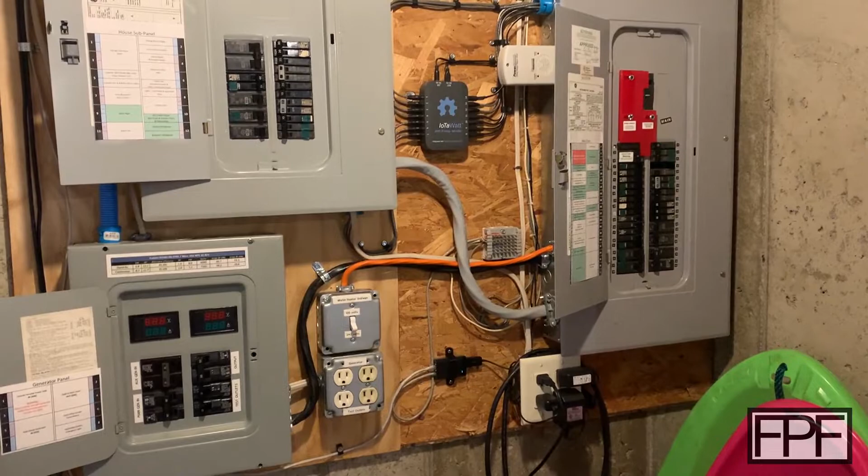I live out in the country and the power is not super reliable out here, so I have a backup generator. And this is my main panel here.

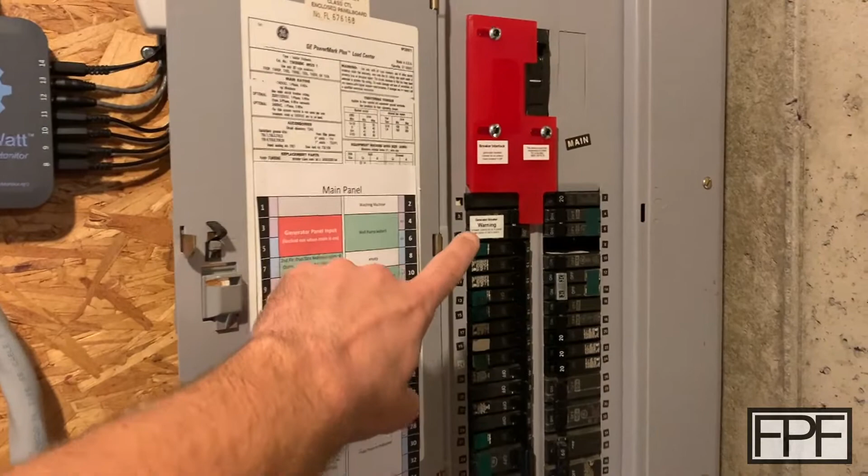Years ago when I put the backup generator in, it essentially backfeeds a breaker here. And what makes this setup safe is I purchased a physical interlock that makes it so this breaker must be turned off to be able to turn the main breaker on.

If we have a power failure, I can turn the main breaker off, slide this over, and then it allows me to turn the breaker that backfeeds this panel from the generator on.

Now this doesn't actually run right to the generator, that runs over to this panel here. This is the panel for the generator. It's just another electrical panel that I reused.

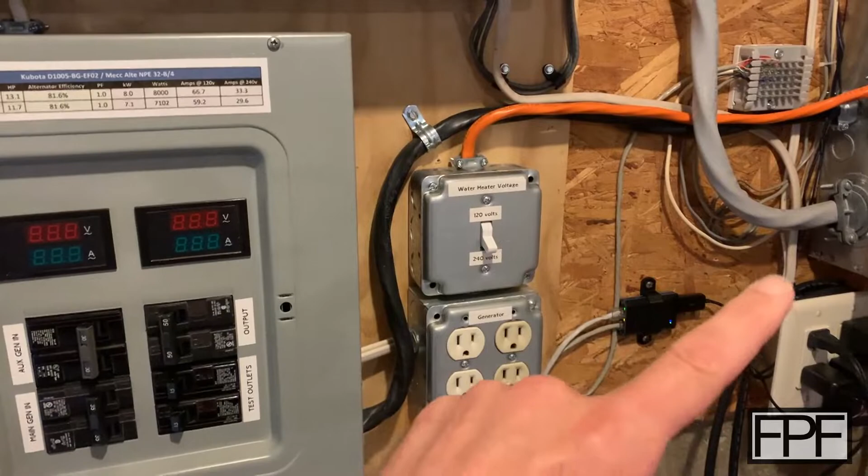I did this for a couple of reasons. I wanted to have these meters in here to see what the load was. Also have the ability to feed some test outlets even if the output to the main panel was not on, but also to support a second input for another generator.

And I am using that now. So this is the input for my main generator. That is a pretty decent sized diesel generator in an outbuilding.

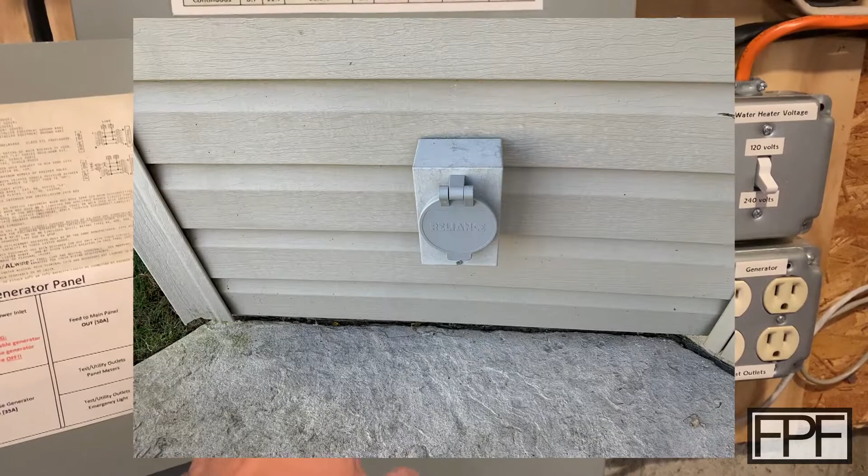But I also have this aux gen input that goes to just a power inlet on the outside of my house that I can connect a portable generator to.

In fact, I've got one of those little Honda inverter generators, so that if for some reason I have a problem with the main diesel generator, or I just need to stop that and service it, like change the oil or fuel filter in an extended outage, I can switch over to that power inlet and use a smaller generator to power just essential circuits.

The problem here is I have no interlock, so you can imagine a scenario here. There's no power to this panel right now, but if I flip this on, now I've connected electrically my main diesel generator into this panel, no problem.

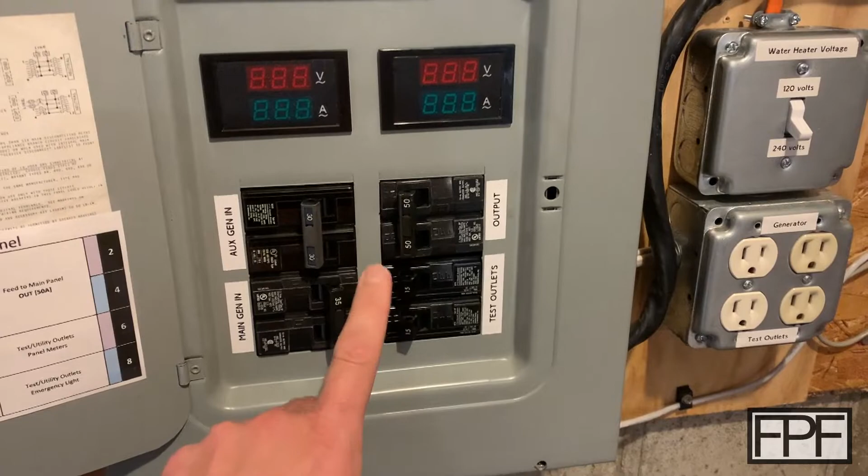But if I turn this on as well, okay, well now I've also electrically connected the generator inlet on the outside of my house. Well, there's nothing plugged into it, that's just fine, no problem.

But if I had both of these on at the same time with either one of these generators running, it's going to try and energize the alternator on the other generator and cause some pretty significant problems, both from a physical and electrical perspective. I mean, there might be some protection on the input of at least the smaller generator, I'm not sure.

But it's going to try and turn the stator on the other generator, and if they're both running and I flip them on, it's going to try and pull them into phase at the same time. Bad things are going to happen, long story short.

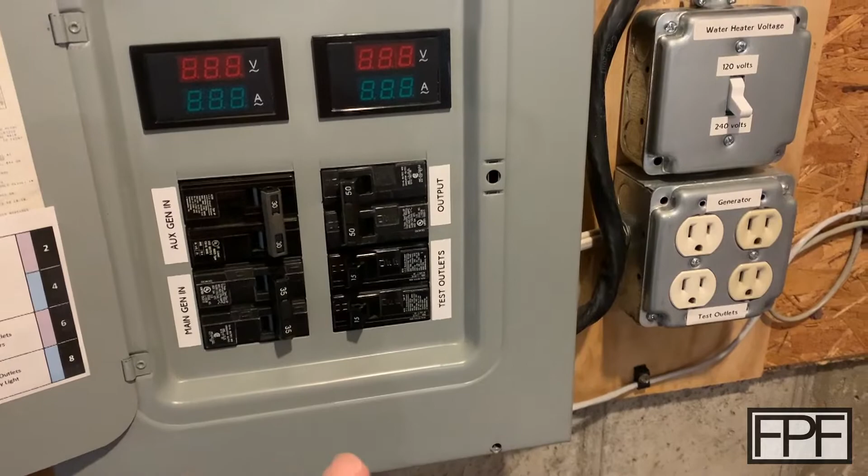So I need a similar interlock here as to what I have over here. And this one is just, I think, laser cut out of some sort of acrylic. And then you can see it slides on these three, I think these are called Chicago screws. I'd actually have to turn my main breaker off to show you how this slides.

But it's just a physical interlock, again, made from acrylic, that prevents me from engaging both of these breakers at the same time. I think I can do the same thing over here.

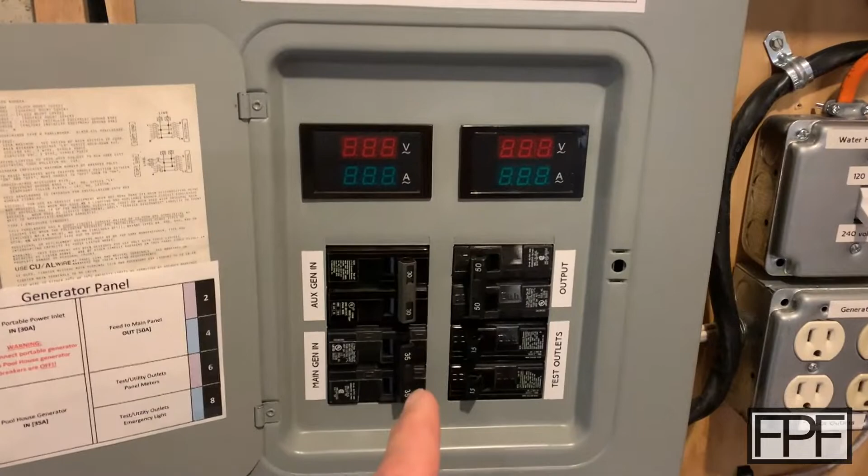And I'm going to try and do it with a 3D printed part. I don't see why it wouldn't work. I'm thinking PLA should be nice and rigid.

In any scenario where there was some sort of fire over here that would cause that to melt, the same thing's going to happen to that acrylic. And it's probably the least of my worries if the house is burning down, having a physical interlock here that would prevent me from turning another breaker on.

So, but I'm sure if you look down in the comments, somebody will still be calling me a moron.

But let's get some measurements on this. I have an idea in my head of how this would work. It just needs to slide vertically up and down and either block this breaker or this breaker.

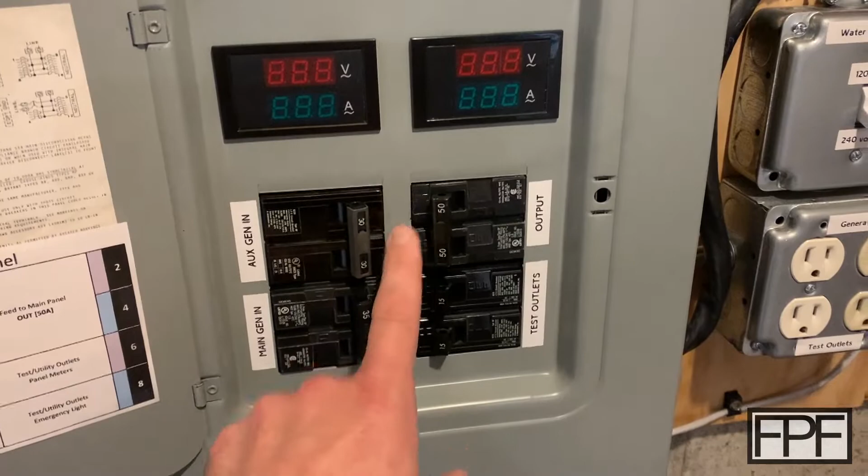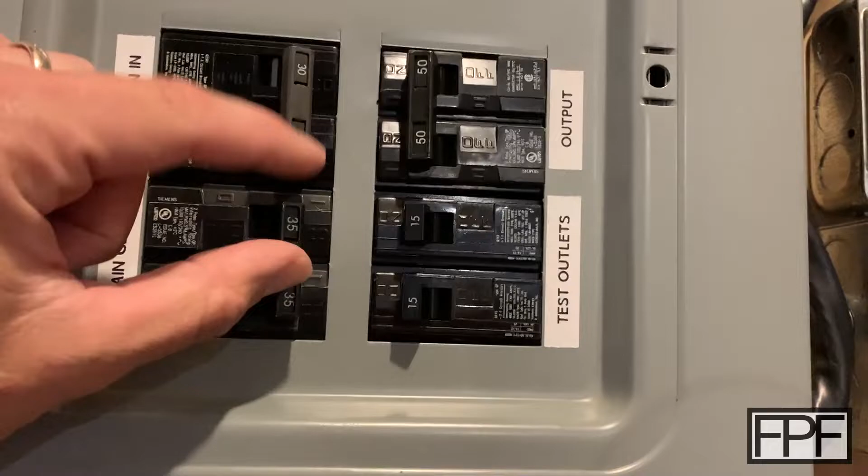And there is a gap between the two, but I think there should still be enough room to have something that slides. So I kind of imagine it's either here in this position and allowing this breaker to be on, or here in this position and allowing this breaker to be on.

So let me get you in a tripod. I need to get a bunch of measurements off of this. I'll probably model just the parts of this face that matter, and then design my part against that model.

So I'll need, let's see, these breakers are elevated in comparison to this surface a bit. So I'll need the measurement of this, the measurement of these cutouts, where the breaker handles sit when they're both on and off.

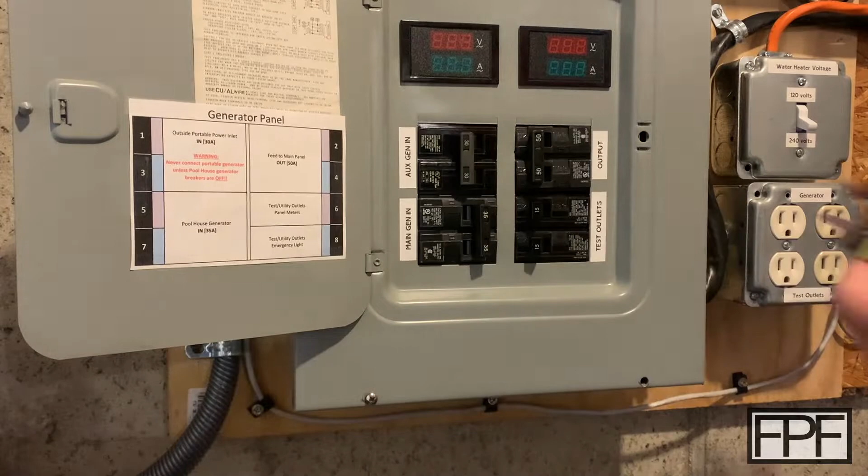I think that's about it. So let me get my caliper, get you in a tripod, and we'll get those measurements. All right, and here is my horrible chicken scratch drawing with the necessary measurements on it, so let's get started.

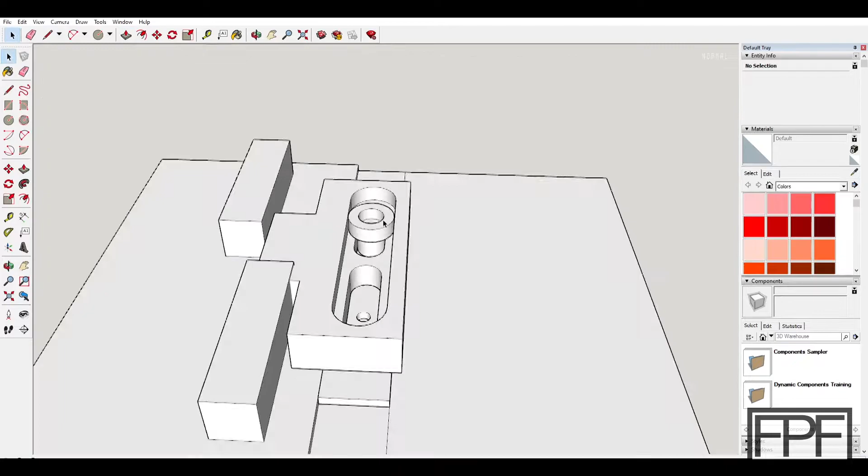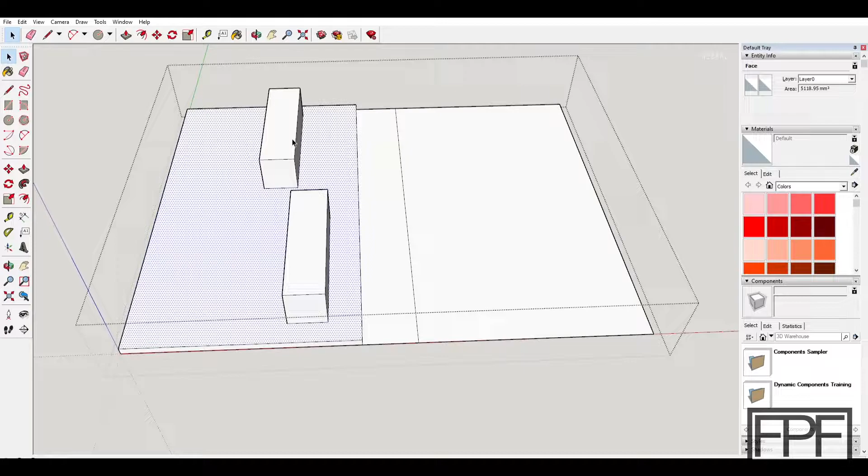The first thing I did was draw up the important dimensions of the breaker panel itself, and the major distances that we need. This is the thin piece of metal that goes down the center dividing the two sides of the breaker cover. This face represents the overall height of the top of the breakers. And this is the total height of the breaker handles, their length, their distance from each other, and their distance from the center in the on position, and in the off position.

I probably could have done this design without doing this, but I always recommend in a design like this, particularly if something's going to be moving and there's a bunch of parts to take into consideration, just take the time to draw very roughly the dimensions of the items you're trying to design around.

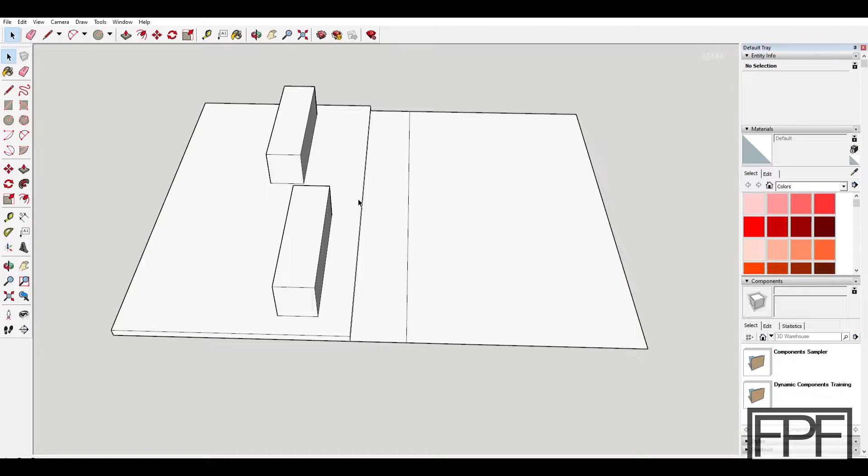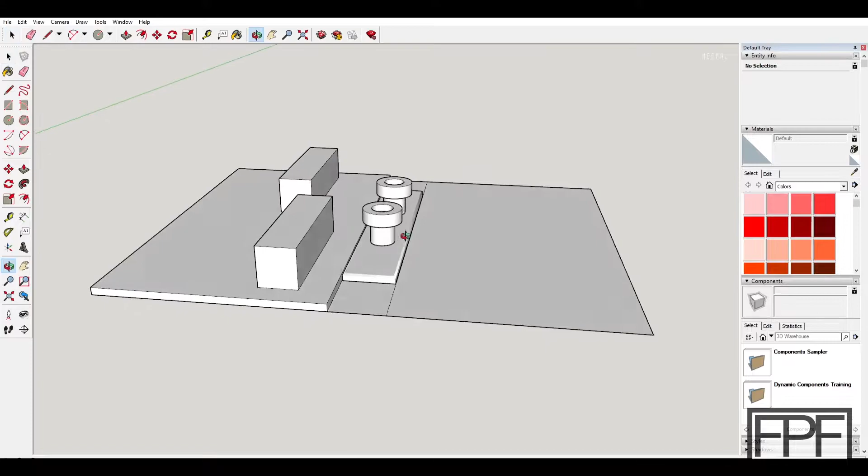Let me go ahead and unhide all the design components. There are 1, 2, 3, 4 pieces to this. I'll hide the sliding piece so you can see there's basically a spacer piece down here at the bottom that brings this whole thing up to the height of the face of those breakers.

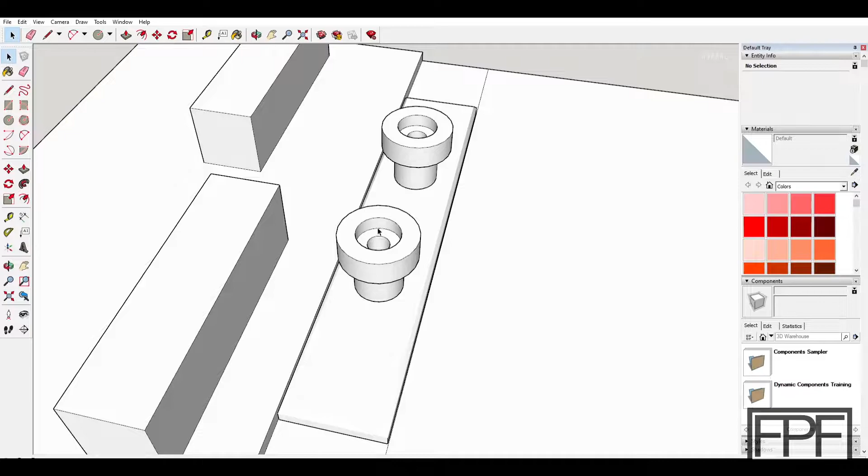Then there are 2, I guess we could call these standoffs, that will utilize machine screws going down into them, and those will thread into the actual steel piece that runs down the center here, which will be drilled and tapped. There's a shoulder in here for the machine screw head to sit against, and the idea is these will tighten down tight against this spacer, and then tightening the spacer tight against this steel surface here.

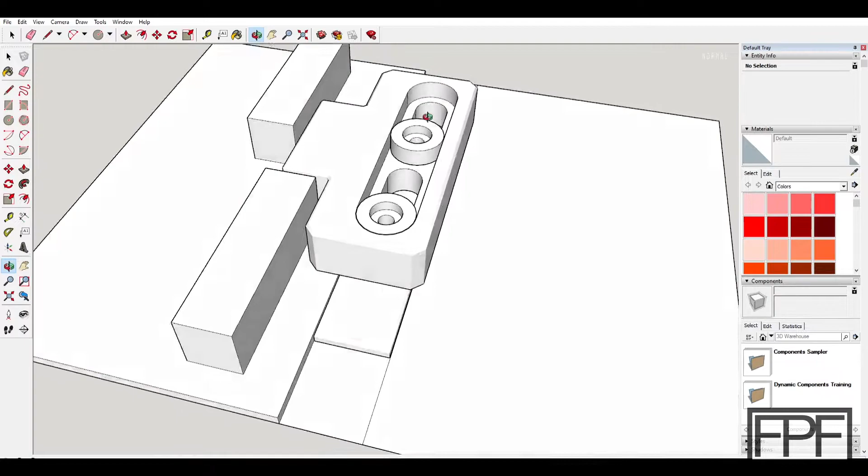And then the piece that I hid, bring that back, basically just slides freely in these channels here. There's 0.2 millimeters of clearance between the underside of the standoff and this face, and 0.2 millimeters of clearance as well on the sides here for this whole thing to slide back and forth.

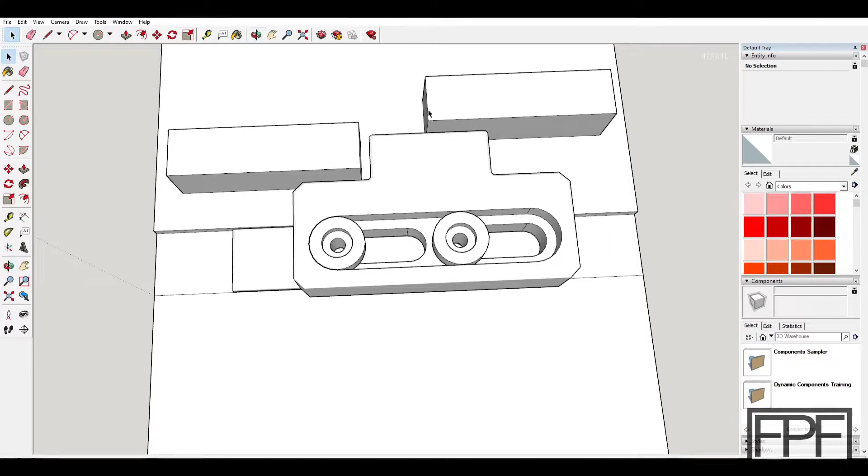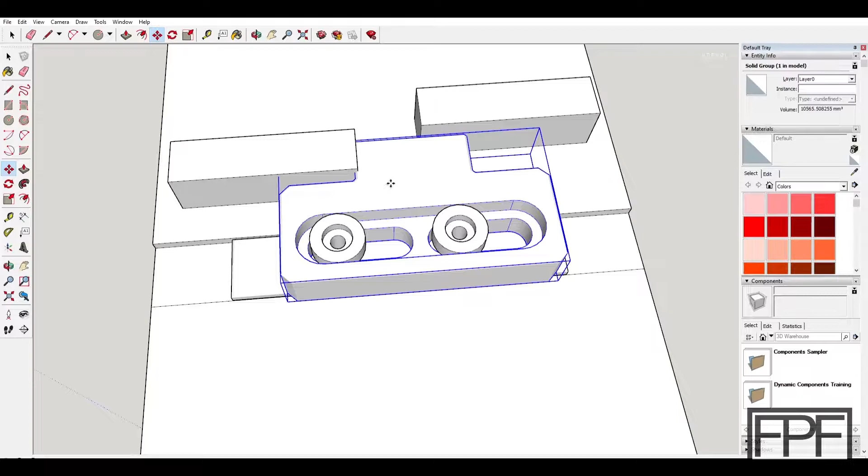And just like that, we have all of our pieces. I did need to make one design adjustment. When I designed this, I originally planned on using M3 machine screws, and when I started assembling it, the M3 just seemed a bit too small. I liked how fine the pitch was on the threads, particularly since we don't have much depth of metal to work with for how this mounts. But the M4 seemed like a much better option, and I think the pitch of the thread on these should still be plenty fine enough for the application.

That means I also ended up with 2 of these because these holes are sized for M3, and I had to print another set sized for M4 as well. I kept the small one here - I got rid of the M3 ones I had printed, but kept this because I figured it would be useful, since the holes are smaller, for marking where I need to drill holes in the electrical box, or the cover for the electrical box. You can see the comparison of these two here. I think this is just more appropriate for this application.

So we should be able to basically test assemble this now. Again, we have this shoulder up here that will retain this, and then this surface here is going to slide back and forth on this surface here. So we should be able to drop these guys in.

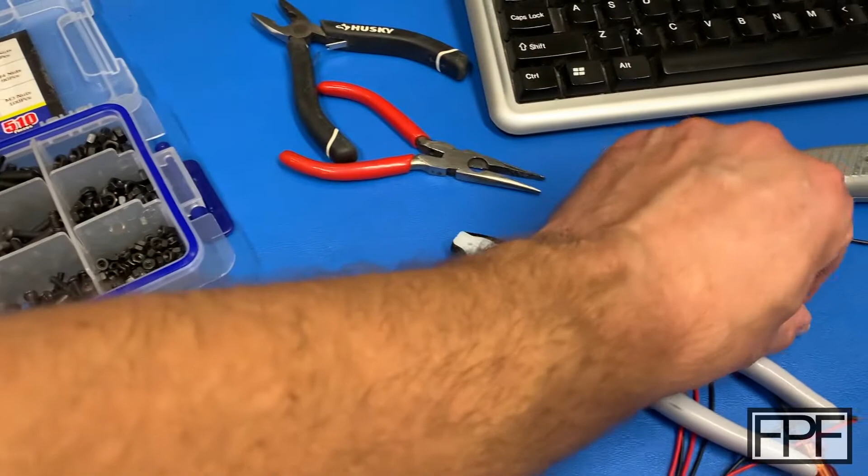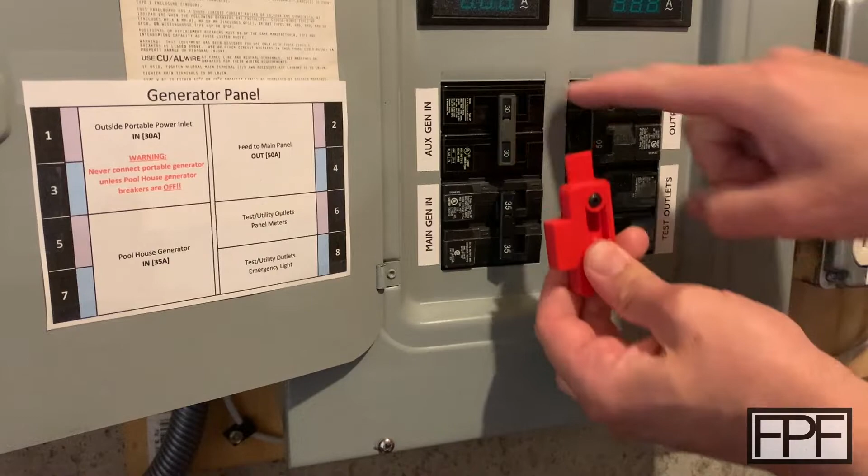Okay, so this is going to go on here. This piece here is going to be centered on this piece of steel here. Actually, to center that, I could take this off, measure the distance, tape it in place, and then mark the two holes I have to drill and tap on this steel piece. So this will be in roughly this position.

Let's see if we go down to the lower position - we can turn this breaker on now, but not this breaker. That's blocked by this. But if we turn this one off, we can slide this into the uppermost position and turn that breaker on. But now this one is physically blocked. So that should do it for us.

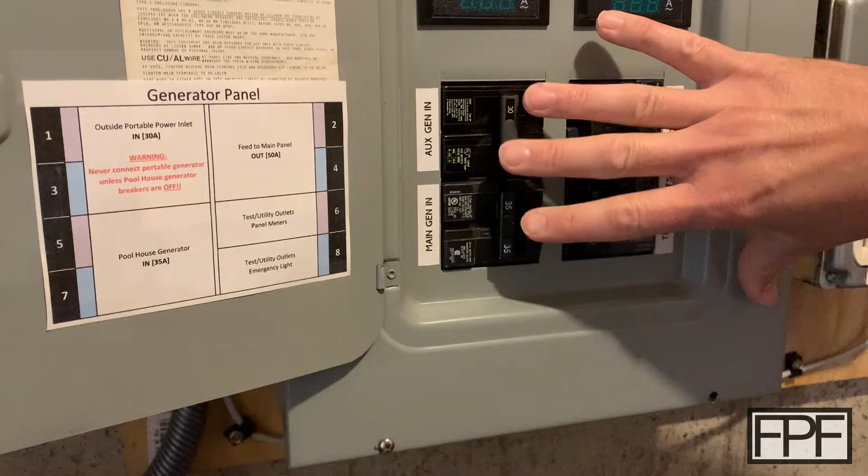Let me get this piece off, taped onto here, centered. Actually, I'm not going to use this piece - I'll use the other piece I made where the holes are a bit smaller. We'll get that taped in place, and I'll mark those holes. Then this steel cover is going to have to come off so I can drill those holes and then tap them for the M4 machine screws.

Okay, I got this piece centered up. I just positioned it roughly where it looked centered, then measured both sides and adjusted it till it was equal. Taped it in place, and then marked through these holes with a marker. So now I have the two locations I need to drill and tap holes. I'm going to center punch these, drill them, and then tap them for an M4 machine screw.

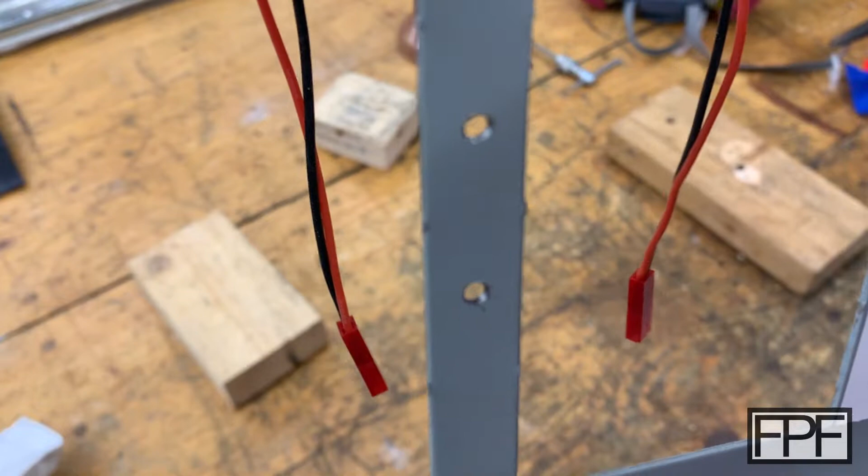All right, very pleased with how those came out. I don't know if you can see those on camera, but those are now drilled and tapped for M4. So let's go ahead and install the actual interlock switch onto that piece.

All right, I'm having one small problem here. When I'm tightening these guys down all the way, it's tightening up on this block. It looks like these standoffs should have been just a tiny bit taller to make sure I am fully clearing this top piece here. So what I mean is I should have made this plastic piece just a little bit taller. Actually, as soon as I pick this up, I can see what's going on. I don't know if I can get you the right camera angle, but there's a little bit of a bend in this piece here, and that's causing it to tighten up against that base piece before they get bottomed all the way down.

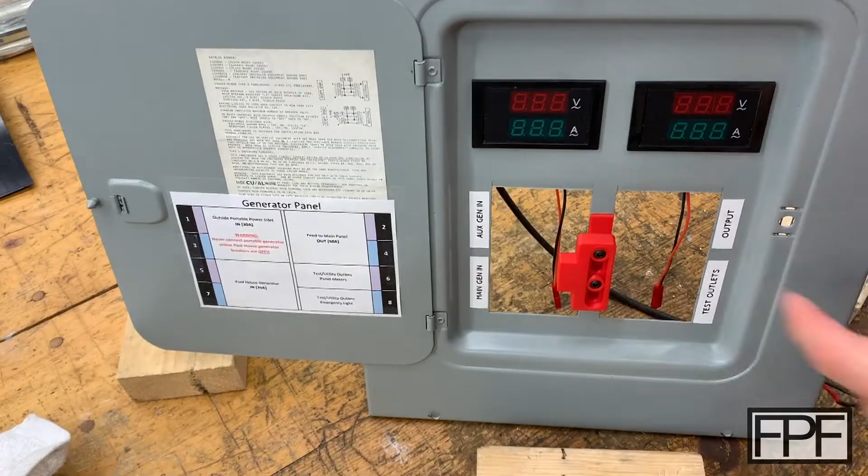I'm going to see if I can straighten that up a little bit and get it a little bit looser, but that's what's going on. I can actually see the gap there when I look down across it. I don't know if you guys can see that in the video - yeah, you can probably see it there. All right, I couldn't capture it while I was bending it, but I've got that center piece straightened out, and now if you look across the back, it sits perfectly flush and tightened up. That rides exactly where it should now. There's no play in it, but it moves freely up and down.

So, all right, let's go get this on the panel.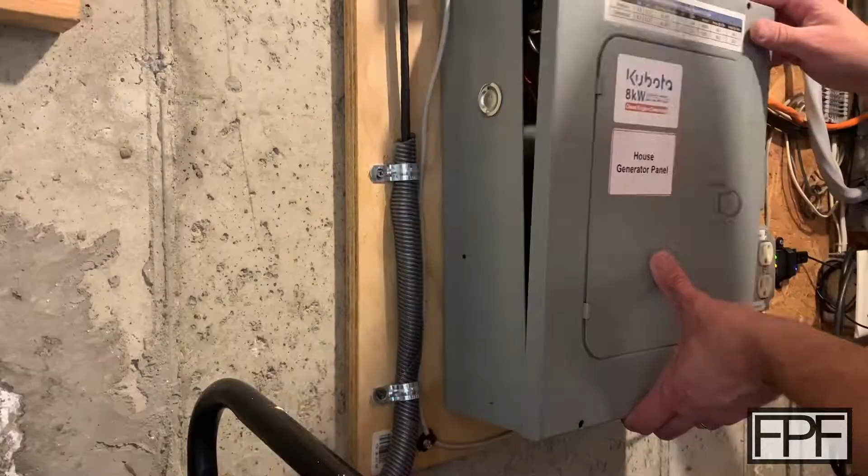All right, I put just 2 screws in the panel here to hold the cover in place so we can test this before I tighten everything down. And I can already see it looks like our clearance is good. We probably could have gone a little bit thicker with this spacer plate here.

I noticed that this is dragging on the front face of the breaker just a bit. It's just touching it, not getting hung up. We probably could have come out maybe 2.5 or 3 millimeters on the thickness of this piece. We have a solid 15 millimeters between this face and the face of the plate, well under that. I think this whole stack up is 12 millimeters.

So if we're in the down position, we should be able to turn this breaker on. Yep, no clearance issues, we're well clear. We shouldn't be able to turn this breaker on. Nope, it hits that right away. And if we turn this guy off, this should slide up enough to clear this one. And sure enough, it does, no clearance issues there as well. I had left 2 millimeters gap here and 2 millimeters gap here.

It looks like we have about probably a millimeter in actuality here. And this one, yeah, there's probably 3 there. So our alignment either isn't perfect or the breaker handles don't line up perfectly. They have a little bit of movement in there, but that's why you leave yourself a little bit of clearance.

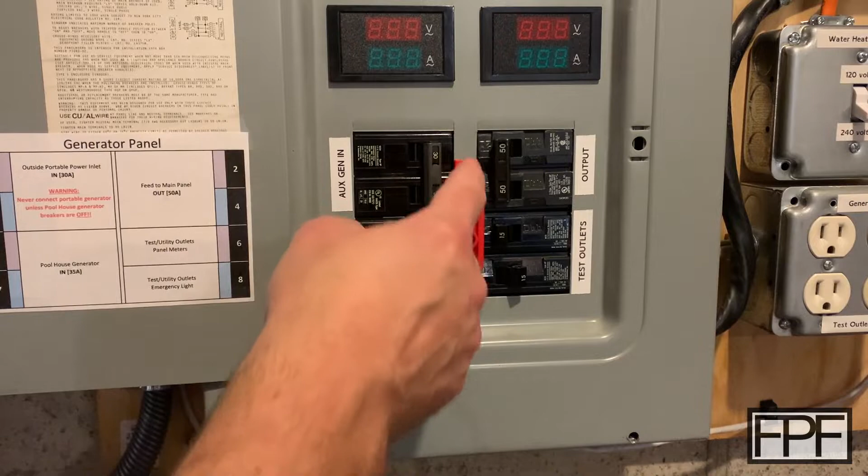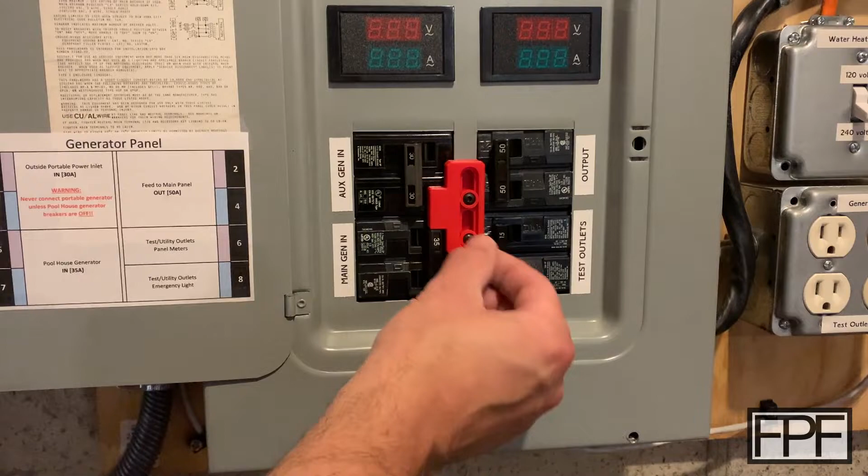I don't have to fiddle with this at all. If I just go down position, breaker on, up position, breaker on. This breaker is a little finicky, there's a metal piece here connecting the handles. If you don't click it far enough over for both handles to actuate, it'll click back. But I'm not actually hitting this plate here, it's hitting against the stop on the breaker. You see I actually have a little bit of movement still to go there. I think I'd left 2 millimeters gap there as well.

So, all right, very happy with this. I'm going to go ahead and put the other screws in, but I think this is all set to go.

I mean, could you override this? I don't think you could override it pushing on this, I don't think you could push hard enough with this breaker handle. Sure, you could come along with a screwdriver and take this off, but that's going to be true with really any physical interlock. The point really is to remind myself while I'm half asleep firing up the generator, or if somebody else is operating this equipment, to not make the mistake of turning both the aux gen and the main gen on at the same time, and this accomplishes that.

We can still have both off for service, and the switch can be in any position, but it has to be in the position that blocks the other handle to actually be able to turn a breaker on.

I could, in theory, if we go back to my main panel here, I could probably redesign that as well in PLA, and it would perform the same function as that acrylic one. The acrylic is probably a bit stiffer than PLA, but you can see in this application, it's not like the flexibility of the material is going to allow us to defeat this interlock.